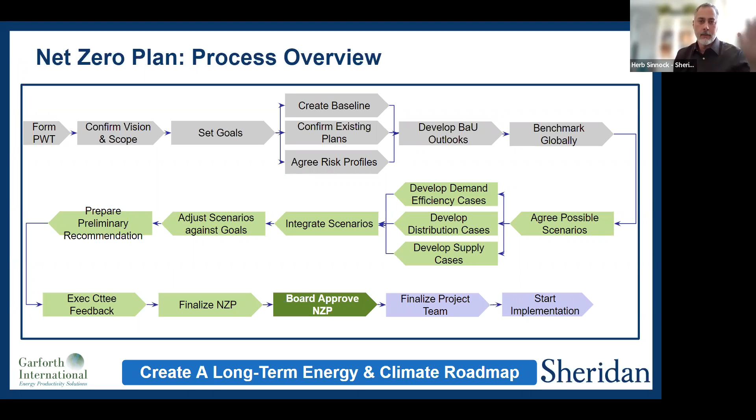And if it has confidence that it's either achieved it or achieved it enough, then the next is that approval step. It's essentially moving your plan through those approval stages. At that point, you'll have a lot of evidence to support and back up the decisions and analysis you've done. So I'm not saying that you need to hit your executive and board with the book of all the stuff you've figured out, but at a high level, you're able to say, we definitively find these statements. Here's our conclusion, here's our recommendation. Plenty of backup if you want to read it.

Quick note on just the benchmarking and stuff. Recommend pulling out energy models. With hundreds and hundreds of buildings, that can be a really difficult exercise, but we found even in community work, it's possible to really work with a few common archetypes. So think about a building that's a residential tower versus an academic classroom versus a laboratory facility versus a gymnasium. They all more or less have a similar archetype you could create.

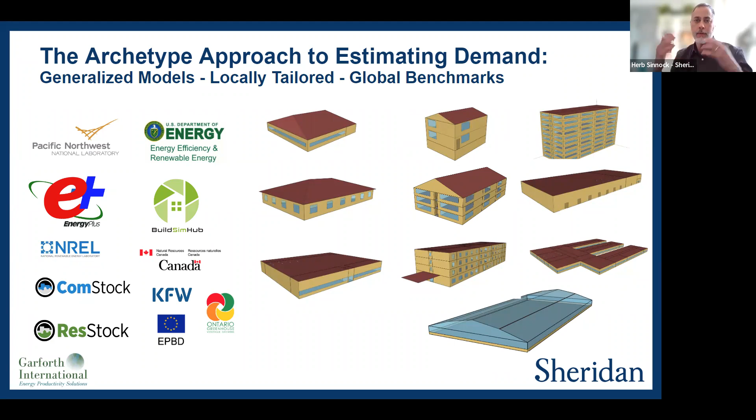And there will be a few exceptions, the very creatively built new building or a particularly poor performer that you could add into the mix. And so then with a bit of work calibrating to the bills and the consumption, you can actually build a pretty representative sample of what's happening.

And the beauty of the modeling at this stage is it gives you quite a sense of the breakdown by end use, and it allows you to figure out how much effort you're targeting to something like envelope versus heating systems, cooling systems, and so on. And in turn, the models give you a tool you can use to do a bit of the what if and the analysis pieces, those sort of key bits of the mix, so you can determine the impact of adding more insulation or improving infiltration, for example.

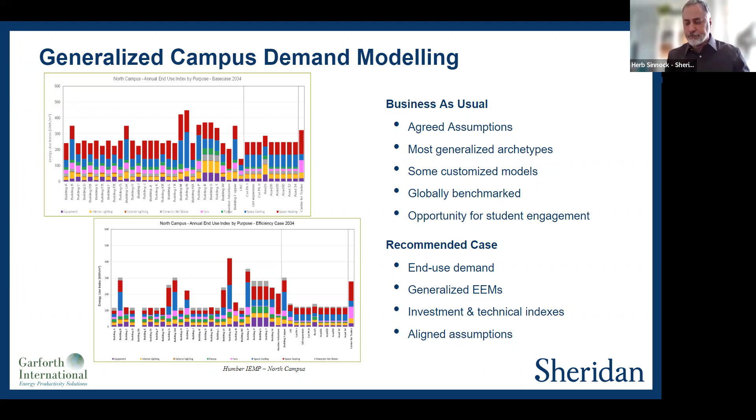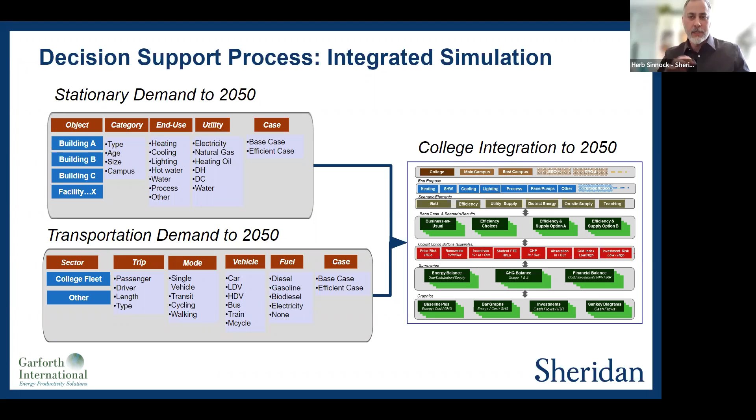The last piece I'll show you on process is there's an integration step. Again, not advocating for tools, just saying there's a lot of information. It's got to come together. The way Garforth tends to look at it, which I kind of like, is give you some buttons so you can look at it campus by campus comparison or put them all together. You can look at end use. You can look at the different scenarios.

So remember I said that you're stacking scenarios in. So it might be, how much savings did we manage to create from fixing buildings? How much did we create by improving the integration of heating distribution across the campus? How much did we save in the plant? And being able to stack those up shows you kind of what each contribution is and then how they work to the whole. And it allows you to then cluster those in different groupings where you can do a side-by-side comparison.

On the output side, you often will include a bunch of sensitivity analysis. So either adding in a component or changing a factor for enrollment growth or factoring in incentives or not, and so on. You want that ability to do a bit of the what if trade-off. And what you want to see out of that is essentially what happens to the energy picture, what happens to the GHG picture, what happens to the cost picture.

And on the cost side, you're going to try to be communicating with your CFO and your board and your executives. So you're going to want financial returns. You're going to want cash flows. You're going to want IRRs. So you want that stuff to pop out of that analysis at the end. Good stuff to have.

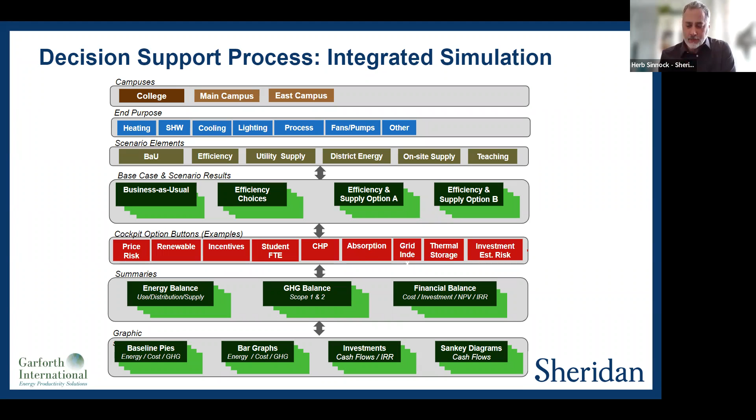So in short, that process I just outlined for you is really an opportunity to, though it's a little bit in vogue, it is a mini crude digital twin of your campus that you can actually use for that sensitivity and what if analysis. And it's looking very much at what happens from the primary fuel combusted or consumed in some way in order to feed electricity or feed heating or whatever the end use function is. And you want to look at that whole picture. That whole supply chain has a lot to unpack.

And looking at the supply chain picture and modeling that carefully might provide surprising options for you, particularly on site and behind the meter options for generation, for example. Also gives you a bit of sense of what happens in the totality of the institution. Quite defensible. Just a very nice platform to work from. Any quick questions on that maybe before I do a quick run of what did Sheridan do?

Yeah, that's excellent. And incredibly data intensive. It's just kind of demonstrating the capacity to manage all that data now. It's just kind of exponentially growing and allows you to do this type of modeling. Is it then a software system that you now have and that you and the campus itself can manipulate and use? Are you that sophisticated, or do you have to work with somebody who's really familiar with the software?

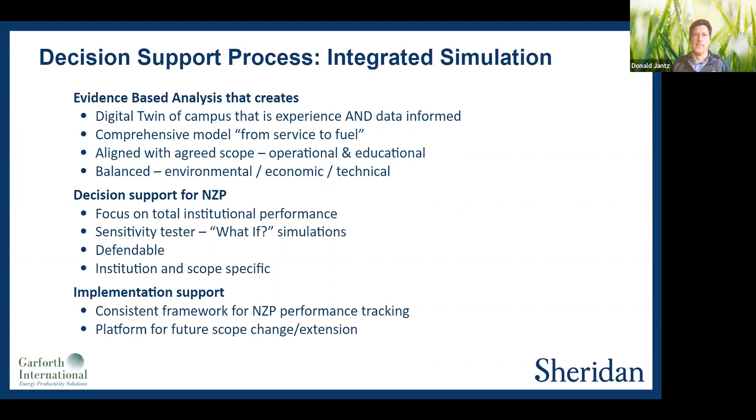Okay. So Sheridan's journey: about 2010, 2011, we realized that we really hadn't been very strategic about energy. We had no long-term view. We were chasing incentives, with very inconsistent patterns of work across the multiple campuses. And there were some really obvious telltale signs, like in addition to really unmanaged month-to-month energy use, you could walk around the campuses and see things that weren't working, things that were really out of date in terms of technology.

And if you dug into any of our building automation systems, you'd notice very quickly there were multiple blind spots. Another telltale sign for us was the mix of heating and cooling equipment from building to building, some with rooftop units, some tied to a central plant. All of that made the campus unwieldy, unmanageable, not very operationally effective. And it's a small operations team basically just trying to chase problems.

So we wanted to focus on some big technical targets. Our first was a push to reduce energy and GHG emissions by about half. We wanted a reasonable return. Our CFO helped us determine that about a 7% IRR might work for us as an institution. Every institution's answer is a little bit different. That's about a 10-year payback, and in an institutional framework, that's probably not all that outrageous.

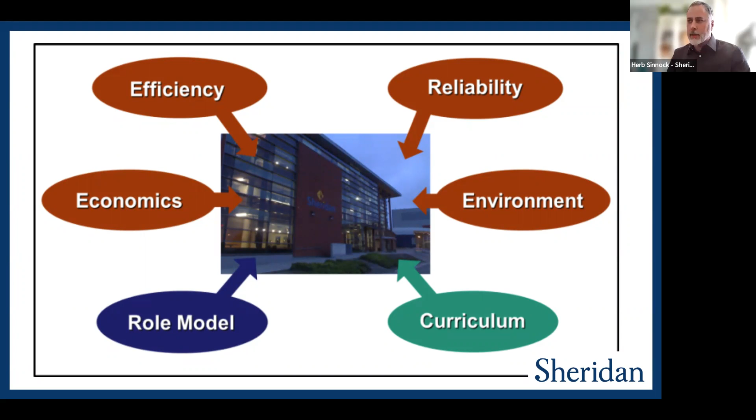And we focused our planning and implementation on three key principles. The first is that we do all of the projects as a single cohesive plan. Again, seems really obvious, but it doesn't happen. The plan says you're doing a 7-course fixed price meal, not a buffet. You don't make a list of measures and then pick and choose which ones you want to do. They all need to be done, because they have synergy and because there's actually an economic loading order to it, which you're seeing here.

We focused a lot, second principle, on where's global best practice. Again, something that sounds light and fluffy when you say it without meaning it.

But if you really put the effort into where is this happening well, in what jurisdiction around the world, again, not just what my neighbor's doing and what's happening here in North America, but in the world, you will find systems, technologies, and approaches that are really, really effective, that can be readily adapted to our environments.

And the third then is do things in the correct order. And this is what got us to this Trias Energetica, created by TU Delft in about the 1980 timeframe. So it's been around for some time. It's in virtually every European state national plan. If you look, you'll find some version of this. And the basic idea, I think I would have you carry away, is you focus first on things that reduce your demand. So if you're focused on an end use service, it's just how do I deliver that end use service with the least amount of energy, least amount of carbon, least amount of pollution.

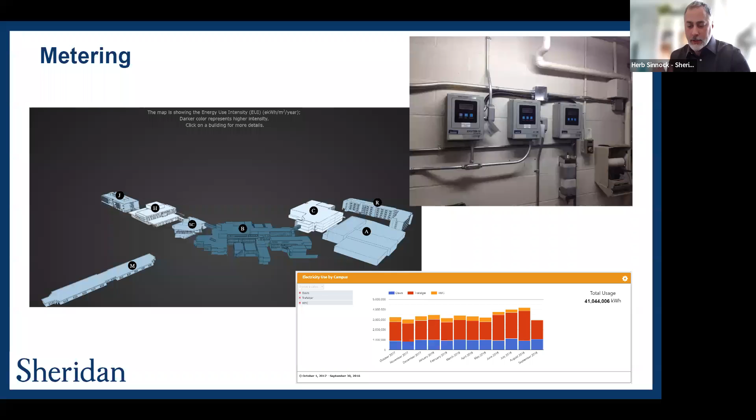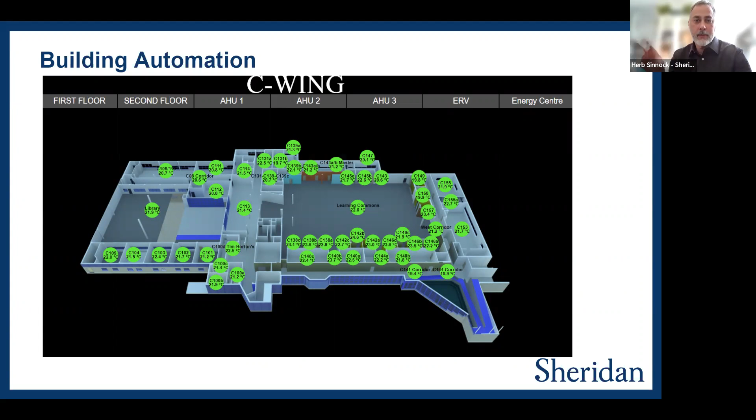So we used that planning methodology that you saw and those principles to effectively ask our board for $30 million. And this is what we did with that. First thing is sub-meter everything. So 81 meters, measuring everything we could about our buildings in terms of the energy inputs. Significant upgrades to building automation. I told you we had blind spots. So this is increasing the visibility, functionality, clarity of what's happening in our spaces, giving our operators the ability to quickly identify problems.

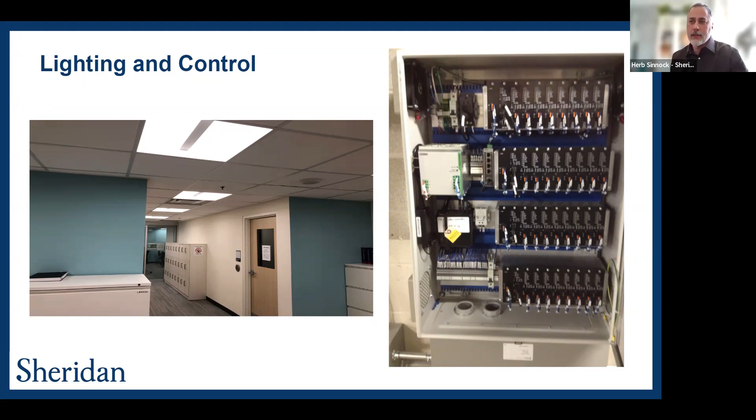Lighting, a really obvious one. The first thing that your energy service companies will go after, because it's a fairly quick win. In our case, we had a fairly efficient T8 lighting system that had been upgraded several times. Where it was really deficient was on the control side, and we had areas that were overlit, just too many fixtures. So our pass-through was a better LED fixture. It was fewer of them, more strategically placed, and tighter controls on occupancy and scheduling.

And I'm showing you a few dated numbers in here. It's about 2019, 2020, so just sort of pre-pandemic, but we'd been through about 55% of the buildings on the Oakville campus, which is about 1.2 million square feet, something like that. Brampton campus had about 900,000 square feet. We've done about 35% of those spaces, and we did a lot of LED, and we've continued on all of those. So those numbers, if I were to update them, are probably a little bit further along at this point.

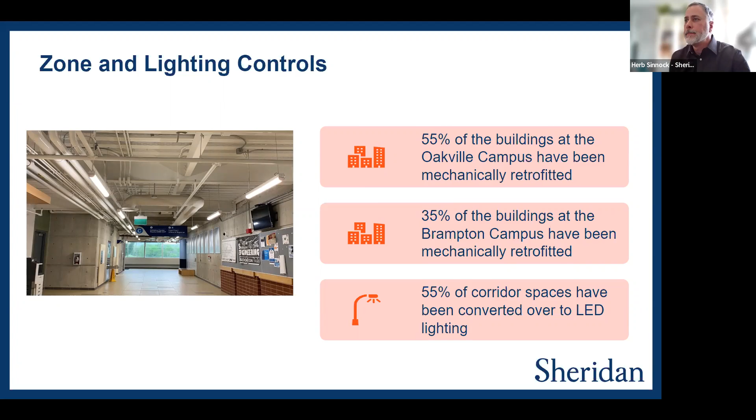And then we did a moderate amount of work on envelope, particularly on solar gain, infiltration around exterior doors. We repaired window systems that didn't make any sense. And we've been working our way a little bit slowly through skylight systems. We've got just a ton of very leaky, poor condition skylights. I've been converting them where I can into this clerestory format because it makes it easier to maintain. And then just a point to the culture.

In the process of recommissioning buildings, rolling out new lighting, redesigning and retrofitting spaces, even just as our normal course of business of like refitting a classroom or building out a lab, we're working with all of the new technological solutions that we'd identified through our energy savings master plan.

And when we got around to the point of some new construction, we were able to really just input that as hard spec, essentially say, this is what Sheridan uses and what we expect to see in the building program. And it was really nice. It built some consistency between the campuses. It allowed us to integrate

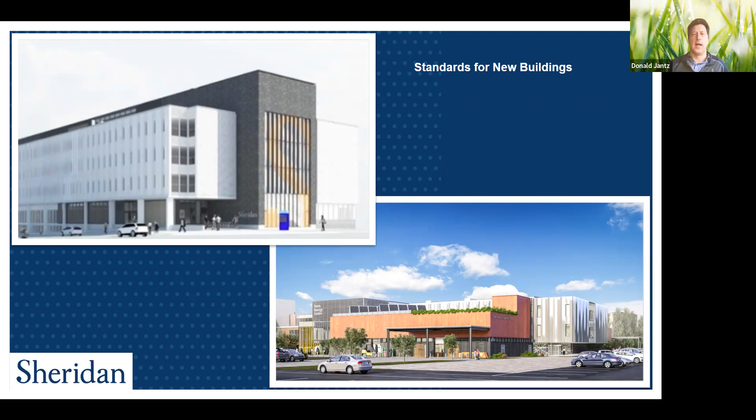But in a couple slides, I do talk a little to where we landed in the results category. I'll give you a bit of that. Absolutely, we can wait for that. Okay, so this just follows the Trias Energetica a little bit more for you, and I'm going to step up the pace a little bit because I want to leave some time.

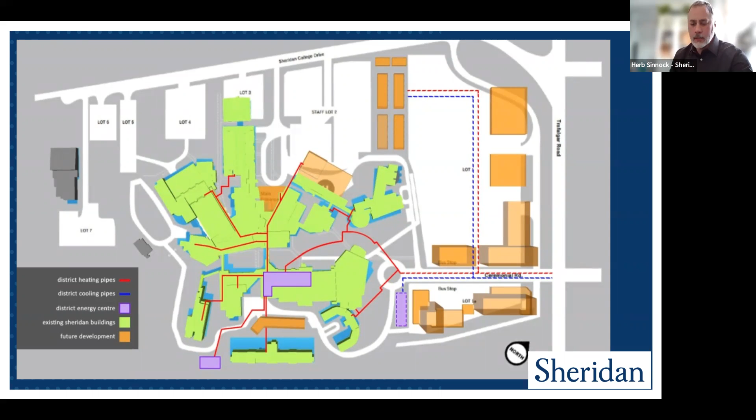So we really wanted to focus on how do we get all the buildings onto a common network. Remember I mentioned rooftop units, like not every building was tied to something. So you can see here our initial thinking about how pipe networks would end up linking the buildings with hot water, and also how we'd provide for future capacity, which is what you're seeing in the transparent beige orange on the right. So all of that went into our early thinking about the integration.

About summer of 2016, we began actually installing pipes in the ground on a couple of our campuses. So you're looking here at an EN 253 pipe. This is a global best practice, the European standard pipe. It's factory made, and essentially factory made as a system. So they'll ship it to you in pieces, but the manufacturer will tell you this part connects to this part, use this fitting, put it here.

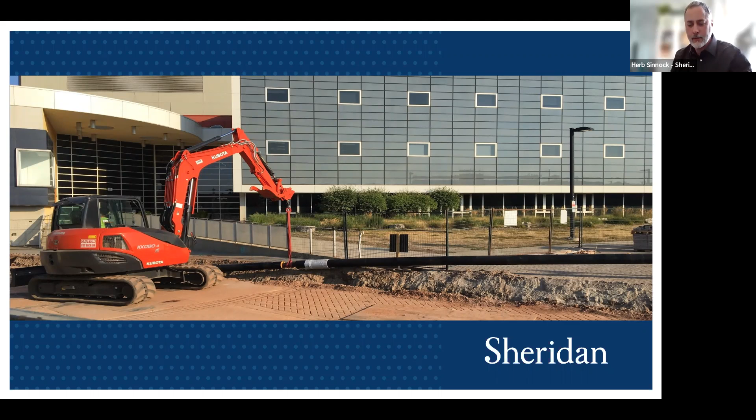And when they do that, it allows them to actually engineer your system to handle expansion naturally. So you don't have to put in funky expansion loops and other weird things. It'll just handle it with 90-degree bends. It's a really cool pipe spec because it's got a nice hard jacket to protect it from all kinds of abrasion, and even to some extent a careless backhoe, but that only goes so far. It has closed-cell foam insulation, so a nice high R value. It'll retain the heat or cooling of the network, as it may be.

You can see there are examples where you have a single direction of pipe, but you could also have your supply and return in one jacket. That ends up being slightly more efficient as well as easier to install in some ways. And it has integrated leak detection. So you will actually know if there's either a leak from the pipe or the jacket's been damaged and there's water getting in, because that affects the R value.

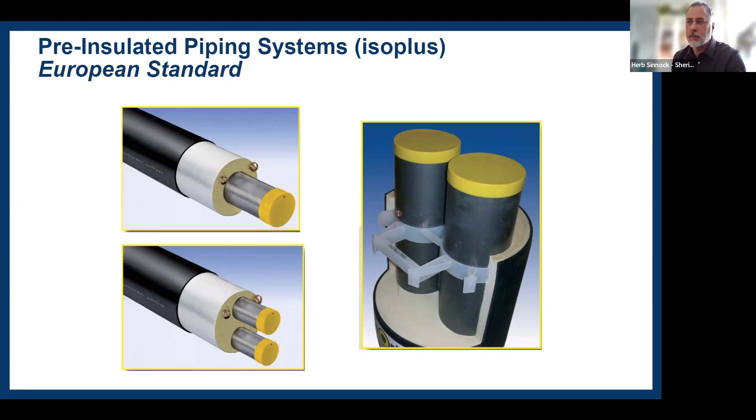And then you could actually put a reflectometer on that. I think you can get within about 5-10 meters of where you've got to dig with a skilled operator with a reflectometer. So really nice, high lifetime, like 50 to 75 years in the ground. Very low failure rates if they're installed well. They don't go very deep. They go in all kinds of terrain, and you notice in the bottom middle that they can actually bend a little bit. They have a little bit of flex to them, so you can actually work them around gentle curves and gradients.

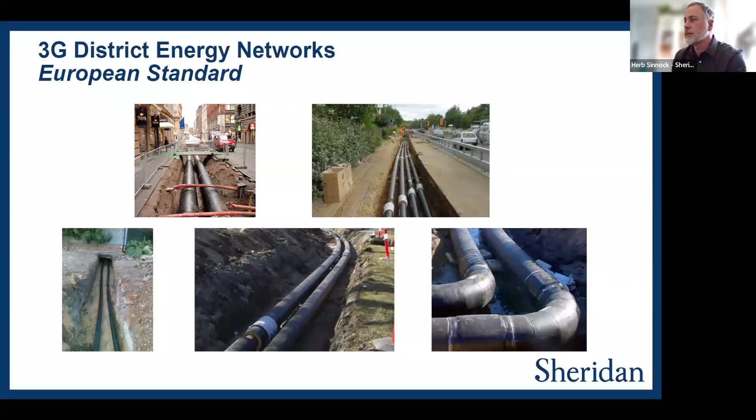These TEDOM units come from Czechia. They're 12-cylinder natural gas engines tied to a generator with every possible form of heat recovery they can find. They'll extract high 80s to low 90s percent of all the primary heat, with very high efficiency. And we've sized them to provide the base load heat for the campus. So they are not electrically sized, they're heat sized. So think of it as a boiler sized the right way with waste electricity, as opposed to electricity sized with waste heat. This is commonly the way people think about them.

And another global best practice was we noted that many European jurisdictions use their energy centers as beautiful architectural objects. I don't have any examples in my slides here, but you can go look them up. They're really, really neat. And we thought we could do the same here. Why not make this a beautiful architectural object, as well as glass it in and make it something that inspires curiosity for our students, for our community. And it's worked exactly that way.

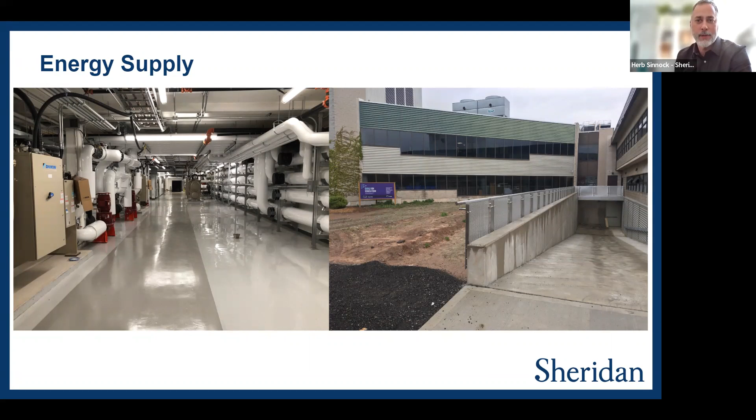These are called energy transfer stations. They're the interface for your district energy system to your building. This is, again, a global best practice. They're manufactured by companies like Danfoss, Alfa Laval, SWEP, who manufacture them globally. In our tender for these, we said we wanted the global reputation, and we wanted the company to establish manufacturing in North America so that our supply was not coming from overseas, and to begin building the market here.

These units you're looking at were supplied by Danfoss. You might see their little logo on one of the control centers there. Again, not advocating for them or pitching for them. The units are nice. Manufactured in Michigan. Once on site, it took about a week or so to get them plumbed in. Basically, we had already brought the pipes nearby. The technician came out, did each commissioning step in about an hour. So I had him do 10 of these over about a day and a half.

And this was just as our heating season was starting. So the fact that we were able to get these shipped and skid, put in place, plumbed in quickly, and more importantly, commissioned and running in a very short period of time was crucial for us. And I think a real advantage to having something like this. But heat exchanger, your circulation pumps, your metering, so you know how much heating water is being distributed.

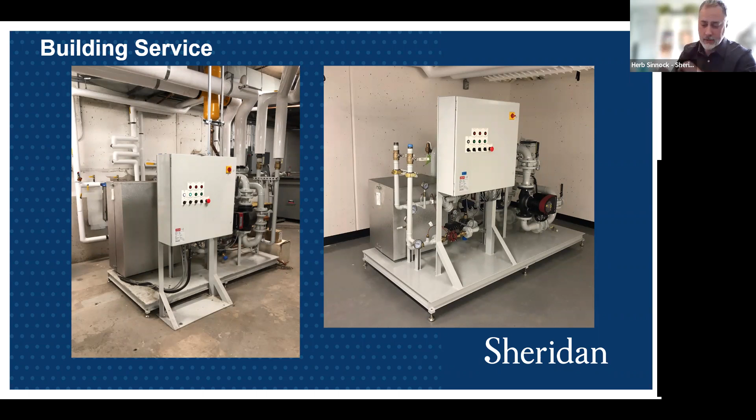Again, slightly dated numbers, but our Oakville campus had managed about a 30% reduction back to source energy by the time we tallied up the numbers. A little bit less at our Davis campus, which was primarily countering a bunch of enrollment growth and a bunch of equipment intensity that came in. Province decarbonized heavily, which helped us in terms of absolute GHGs. We figure we contributed about 11% of direct impact on reduction from our activity just to that point. But in absolute terms, it dropped by about half.

We were and have been basically pulling about $1.5 million off an energy spend that was $6.5 million. And at that time, it accumulated anywhere from $7 to $8.5 million of just simply energy savings return over a few years of implementation. So we were tracking pretty good.

What I would say beyond that is because we were ready with a plan, we attracted a fair bit of federal and provincial investment under the SIF program when it rolled out. And when I tally up a few of the others in there, it presents an interesting picture. Spend out about 24 million, but

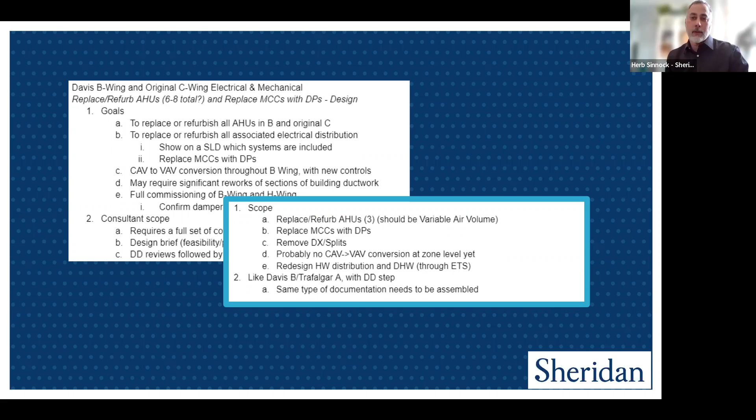So that's an actual building that's in planning? This is one where they've got the architect's early rendering for the brochure and they're fundraising for it. In the meantime, what we're doing is designing the preliminary spec.